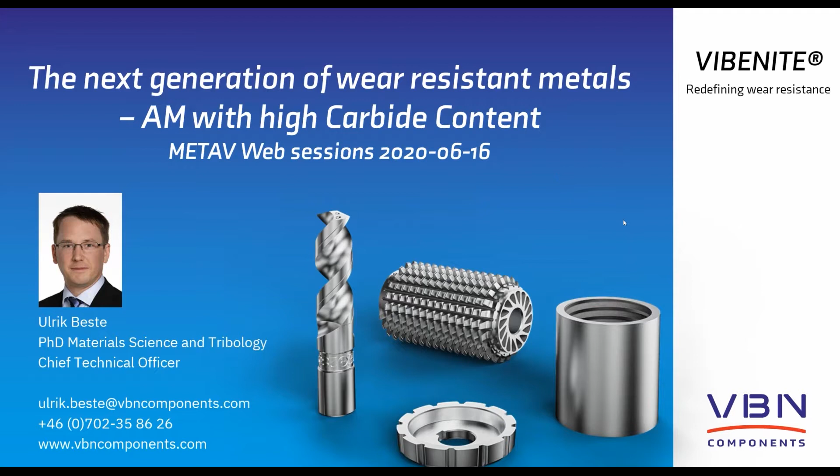This is VBN Components. We are a materials developing company. We have been working in materials for many years. This is based in, you can say, the Swedish powder manufacturing industry. Myself and fellows around here have also been much into tribology, that is the knowledge and science of wear and friction of materials.

So this and the powder manufacturing led to the idea of additive manufacturing of these kinds of materials. And now we've been active for more than 10 years. Here in Uppsala, we have an additive manufacturing production unit, which we produce and develop new materials. So the basis of the company is materials, powders, additive manufacturing, 3D printing, and tribology. This is the base of the company.

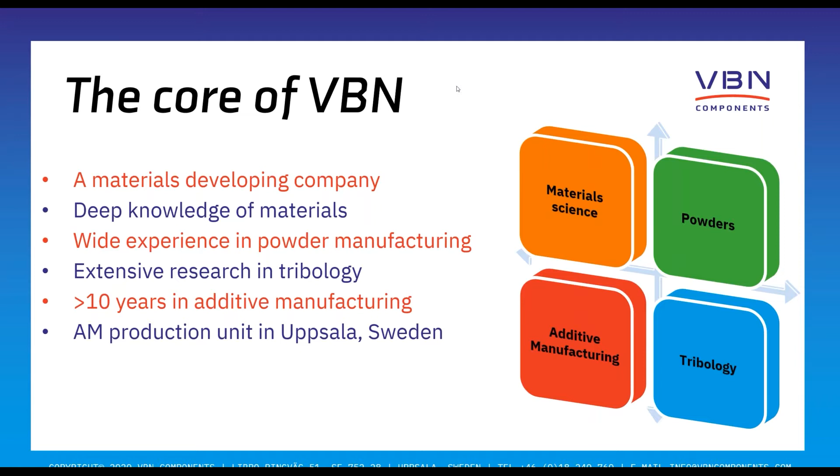Our vision is to renew the materials industry in the world. And today, you know that the manufacturing industry is going through a big change, what is typically called digitalization. And one very important part of this digitalization is additive manufacturing, which is a totally new way of making materials.

In this field, the biggest need is for new materials, and this is due to the developing of the machines being the major driver in this additive manufacturing business. But the materials now comes as the next question: what materials can we do in these machines? And this is what the focus of VBN Components has been from the very beginning.

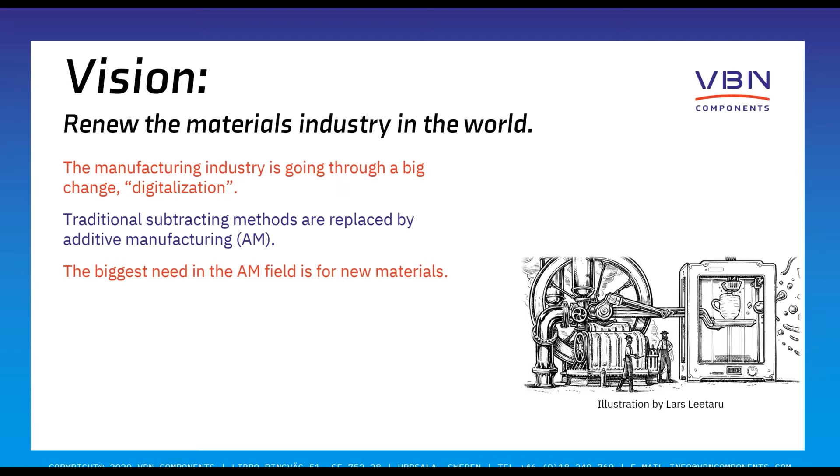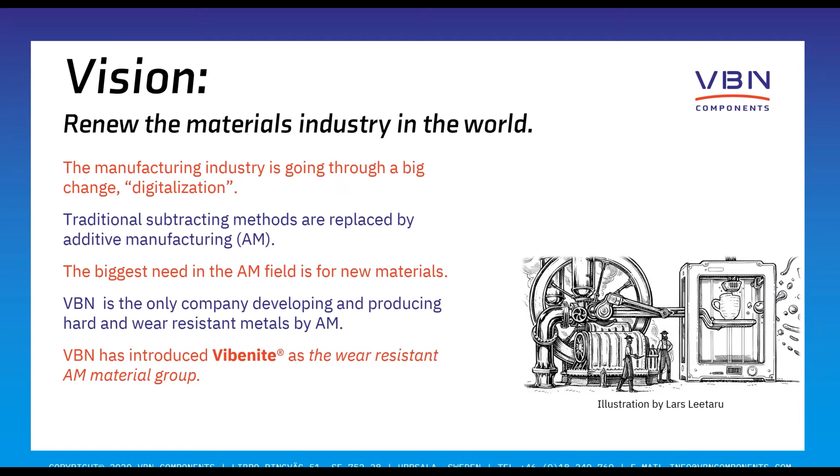And today we are the only company developing and producing hard and wear-resistant materials by additive manufacturing. And we have introduced the Vibenite as the wear-resistant material group. And this is what we are doing at the moment.

If we look into our materials, we today have 6 different wear-resistant materials. Starting from the bottom, which is the Vibenite 130. This is a new alloy that will be launched after the summer, and this is a tool steel, with a hardness range of about 48 to 60 Rockwell. So this is a very tough tool steel material.

You can compare it to H13, which is the most common tool steel material in the world. After that, if you go up in hardness scale, we come to the Vibenite 150, which is a high-speed steel material with a lot of carbides in it, and also higher hardness. It's a metallic matrix with carbides.

If we move even higher up, we come to the Vibenite 280 and the 290, and they are also high-speed steel materials. So 150, 280, and 290 are in the same high-speed steel region. The difference is the carbide content and the hardness. And the Vibenite 290 is the world's hardest commercially available steel material.

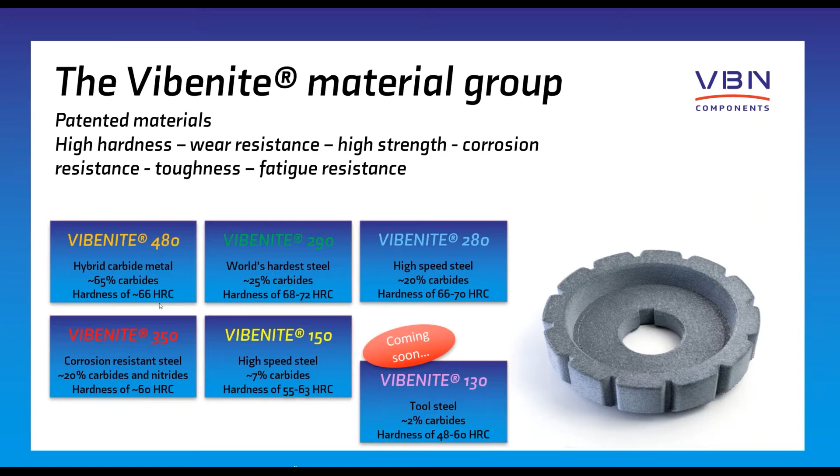We have high hardness, wear resistance, but also high strength, and high toughness in the toughest alloys. We also in general get very good fatigue resistance due to the high cleanliness of the materials. That is one of the major things in our materials—it's only extreme properties that we look at.

If we look at benefits, we have tried to divide them into 4 groups. First, look at the environmental friendliness of the materials. With this additive manufacturing technology, it's now possible to choose a better alloy for your end application. That leads to the total sum of material wasted being much less, because you can have better material in your end tools.

So to sum up, we have a 90% reduction of material consumption. We have a reduction of energy needed for producing the material and shaping the material. We also, of course, have less transport and much quicker development for better products.

In addition, we have long experience in this field, so we can support you with good help when you are trying to develop something new, to really use this technology at its best.

The end performance is, of course, a very important part of this. And then we have the alloys which I presented for you. Typically we have very high wear resistance and very high hardness, and now you do not need to soft machine the materials.

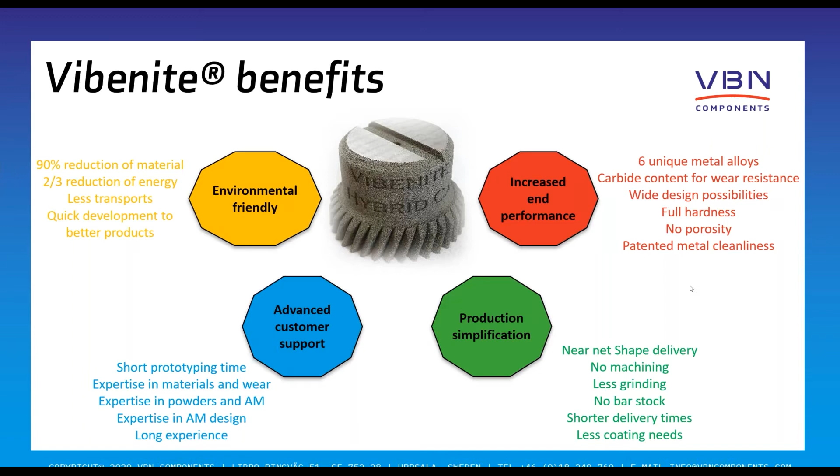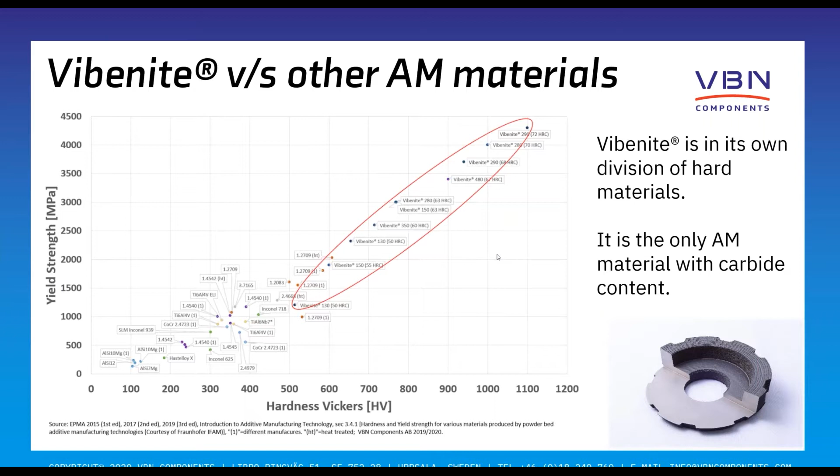So it's not a developing or a future alloy. This is something you can buy from us now.

Why should you 3D print wear-resistant metals? This is a typical comparison. Today, when you produce a component, you first need a material which is made in a steel plant, and you know all the steps in the steel plant. This is 200 years of development, which has come up to a very good quality level. But still, it's an extreme amount of process steps.

Then you send the bar to some kind of warehouse, a bar stock, and then you cut it up, and then you go for the machining in your machining shop. In the machining shop, you need to remove almost all the material which you produced in the steel plant. So you can see this is an extreme amount of process steps, and this is the big drawback with existing traditional manufacturing technique.

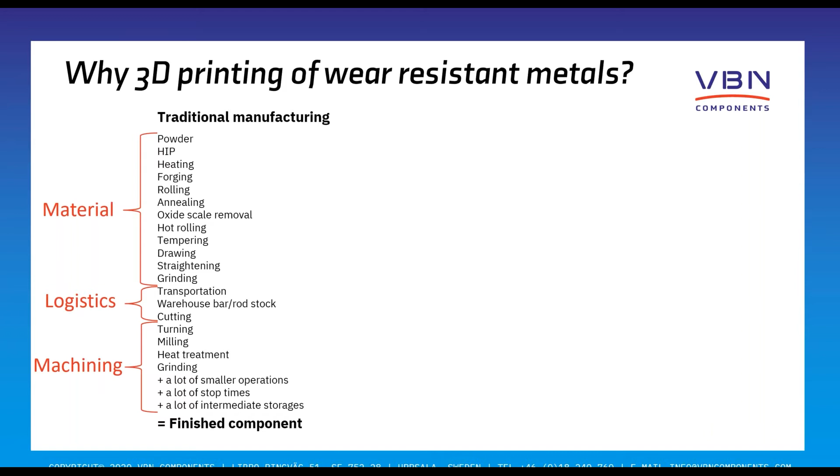By doing the Vibenite way, we take powder, and then we do the additive manufacturing printing, then we heat treat them, then we grind them, and then you have a finished component. This is the major paradigm shift which we are presenting here. This is a totally new way of making components.

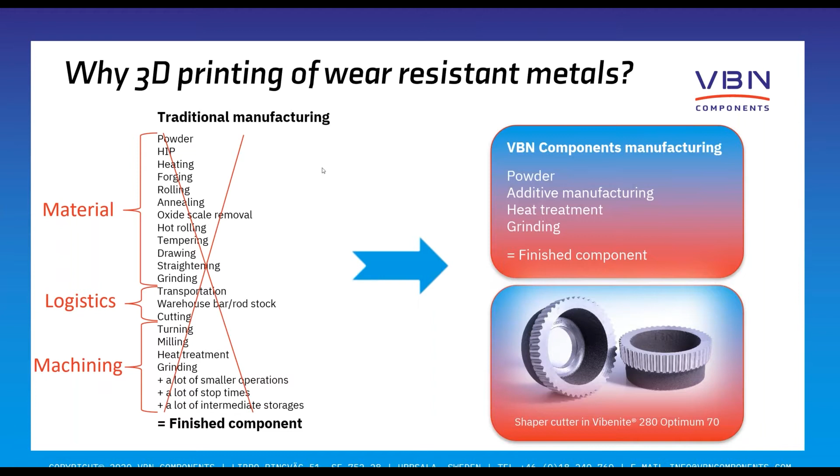If we look at cemented carbides, I'm trying... I don't know why it's not popping. Let me try to switch slide.

Here we go to the cemented carbide. We can look at the traditional way of manufacturing. You take your powders, do a lot of process technology, and then press a green body, which you need to sinter, and then grind it. And then you have the demands and limitations of this. You have this large series problem, you need the pressing tools, and you have shrinkage and sizing issues, etc.

All this traditional technology with cemented carbide leads to very good material, but you have a lot of limitations. Typically you have a problem in the brittleness of the material, and it's difficult to have a complex shape when you need pressing tools, green bodies and sintering. Also you need large series, it's very difficult to make 1, 2, or 10 of something when you need to make thousands to be profitable in the long run.

We do it like this: we take the powder, use additive manufacturing, heat treat it, and then grind it. Then we have a finished component in Vibenite 480. If you see this shift in material technology compared to the traditional, you see it's an extreme change in what you can do.

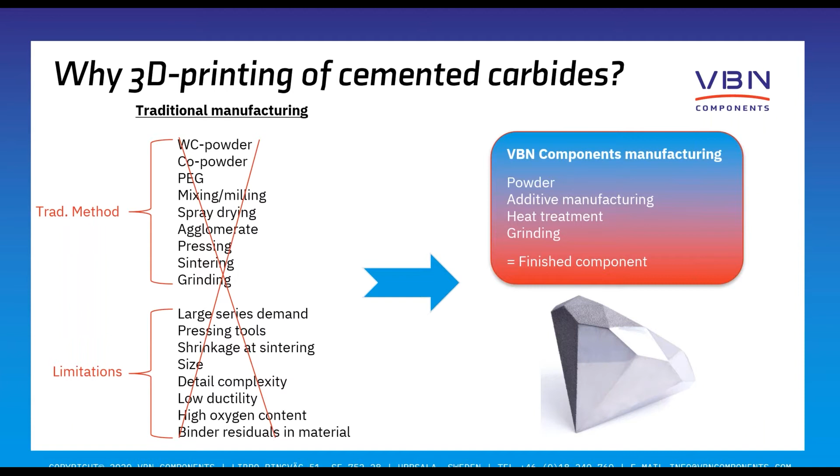If we look at the possibilities, just to sum up, the best profitability is achieved when you have explicit demands of wear resistance, hardness, heat resistance, or fatigue resistance. This is where our alloys perform the best.

We also need some kind of minimum size of the component today, due to the rough surface. We still make component blanks with a rough surface, so you need to grind if you have a cutting edge or so on. This is just a rule of thumb recommendation, 20 millimeters is not an exact value, it depends on your grinding cost compared to the printing cost.

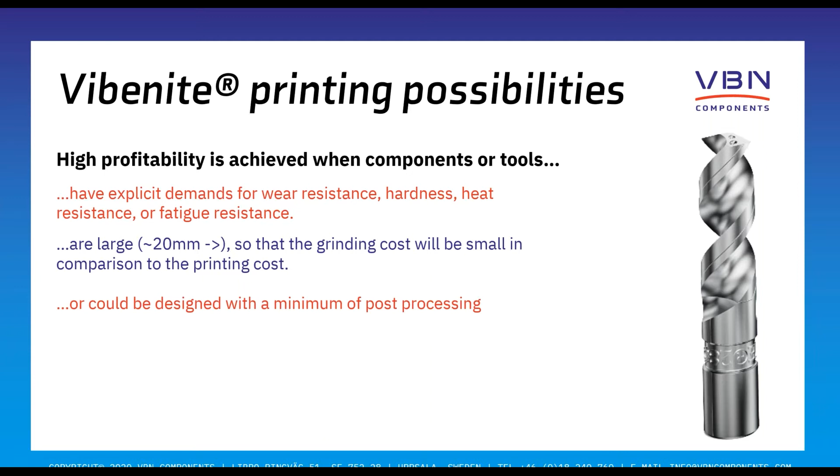You can also design components without the need for post-processing, leaving some surfaces rough where that's acceptable. And you also need some kind of complexity.

Of course we can produce cubes or cylinders directly, but if we do that, we don't use the freedom that additive manufacturing technology gives. We can do a test cube, which you typically do also, but really to benefit from this technology, you need complexity, and you need to use that complexity for better performance in your end application.

Today we have a limitation in build volume, which is typically about 230 by 230 by 350 millimeters. This is a machine parameter that we have today, and the price, of course, is set by serial size.

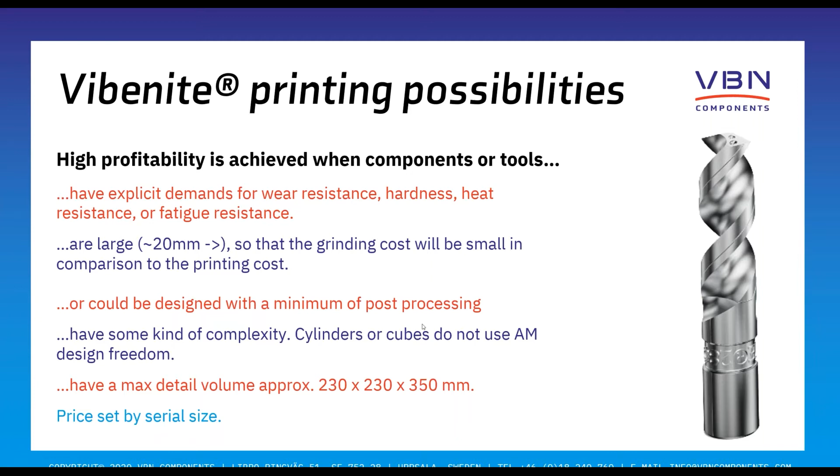If we look at surfaces, I mentioned that we have rough surfaces. You can see here on the picture to the left, we have three types of surface: the upper melt surface, the side surface, which is the most typical and largest area of the component, and number three, the lower surface with support structure traces.

To sum up, you can do a lot of things to minimize the need for support structure, but typically you need support structure to get good geometrical correctness of your component. If you don't, you get some swelling. We do not have the enormous problem you typically have in laser printing, since we use electron beam printing, but we still need to remove energy so that the component stays in shape.

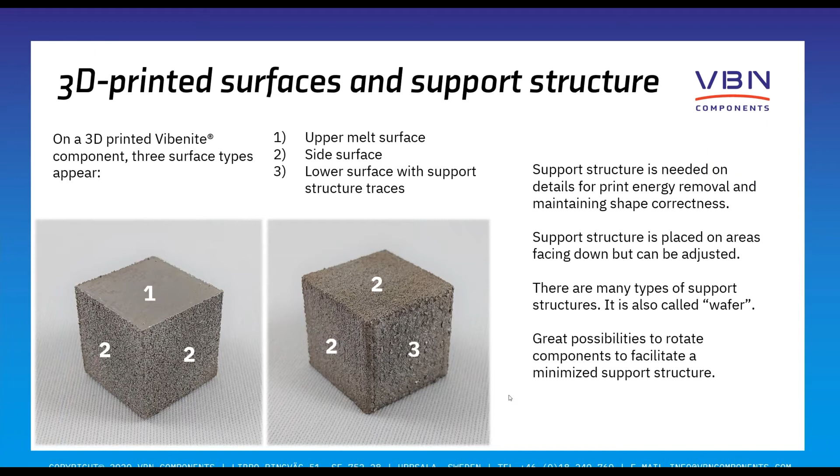Example 1. I will now go through a number of example areas where you can use this technology. For example, power skiving cutters. In this case, you can use better material than you use today.

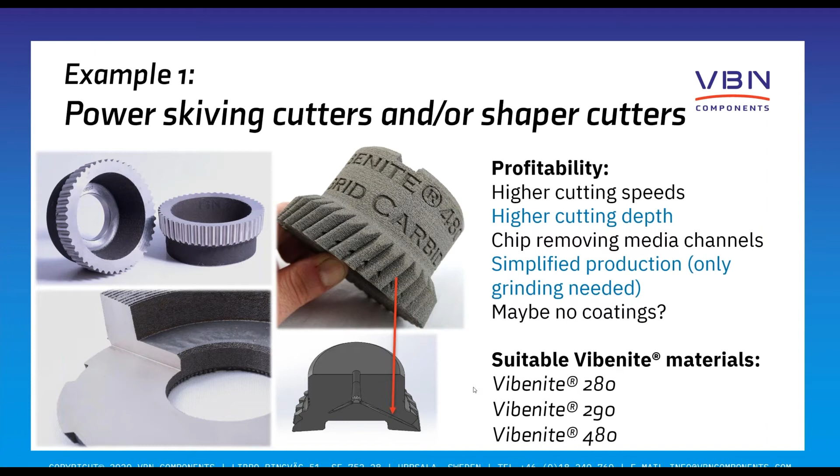Then we have large gear cutting hobs. We have been in this area for a long time, and we see the biggest benefit when you produce large hobs, where you need to reduce the weight and use the best materials to get high cutting speeds and high cutting depths, so that you can get a benefit from this new technology.

You can do a lot of things with this. For example, here you can also add media channels to cool and to remove chips.

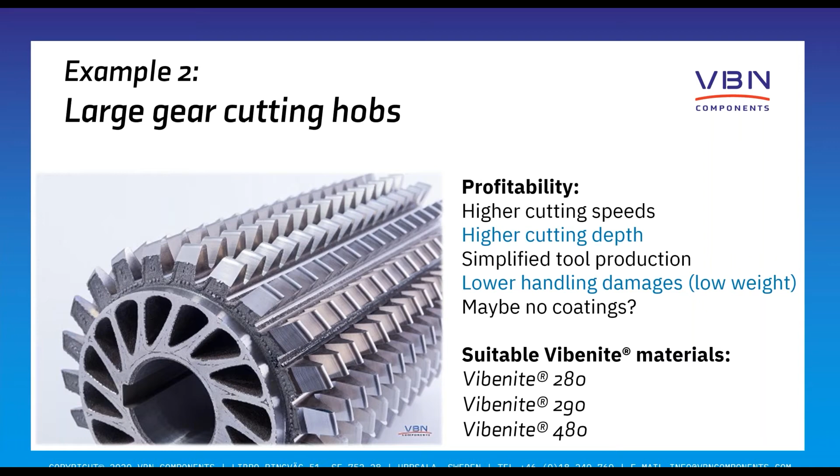Another area is pressure die casting tools. Here's an example from a governmentally funded project we ran a couple of years ago. This is aluminium casting, and we added a very coarse channel through the center of this tool. This led to a reduction of temperature from 296 degrees to 185 — a very heavy reduction of hotspot temperature, which is very good for the lifetime of the tool. This is just an example of what you can do; they can of course be smaller or bigger. This shows that it really works in the real world.

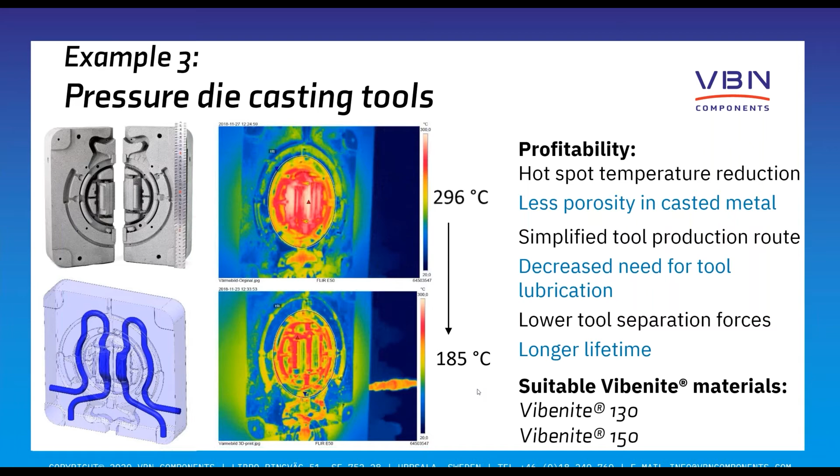Another area, in the same region you could say, is plastic or metal forming tools, or hot stamping tools. Here you can also use the technology to reduce weight, but also to have cooling channels or conformal cooling. You get longer lifetime with better alloys, but you can also reduce weight and hotspot temperatures and so on. So you get a quicker tool cooling time, and longer lifetime in your tools.

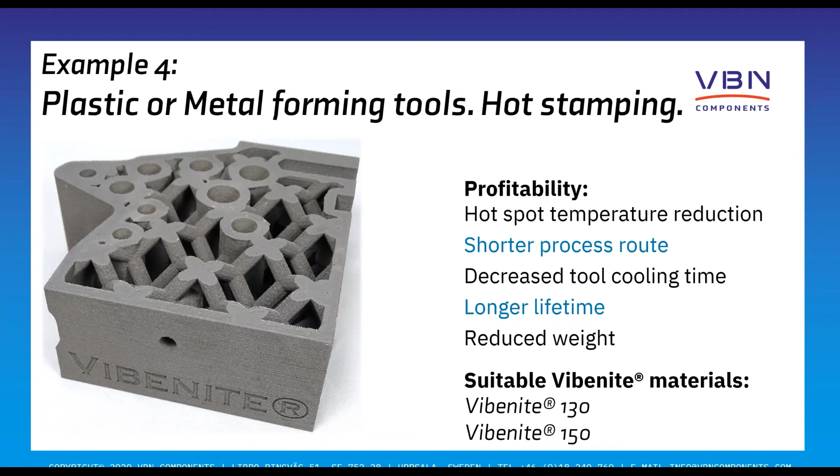Production tools are also a very wide area of what you can do, and here we show some examples. In this case, I made a sample holder.

It's very simple to take a drawing of a component you have, and then invert it to become a holder. You can see the inversion here — this is the diamond we've shown you in the public relations, and then we made a holder to be able to grind it. This is a very simple thing to do. In addition, you can also use this rough surface to get a better grip in your chuck jaw, for example. So here you can use this technology in many different ways — it's also a big area to use it in a good way.

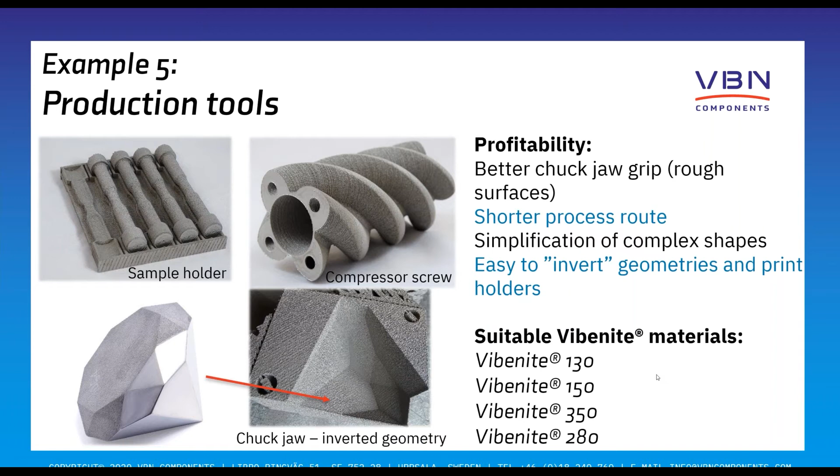Cutting knives is also an enormous area. Here you have sheet stamping examples, and here you have some very good knives in Vibenite 350.

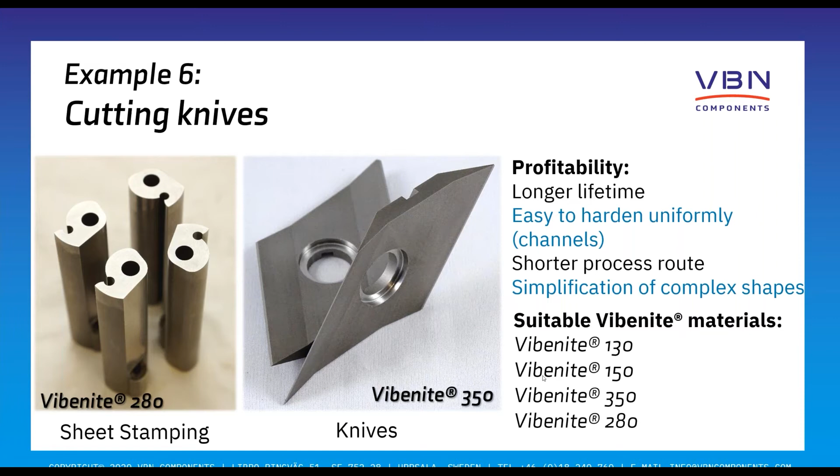One example here to the left, you can see the sheet stamping. You can get a more uniform hardening by having a hole inside the tool, because it's the edge that does the work cutting sheet metal. By having this hole, which costs nothing in the process, you can get much easier hardening, so you get a more uniform hardening, and you get the same hardness even if you regrind the tool. This is just an example of what's possible to do.

Wear protection is also a big area, and it could be anything. Here we have an example of an elbow for a pipe, so that you can have erosive wear protection. But the new thing here is that you can shape very hard materials into complex shapes very easily. That's a new thing, and you can use this for wear protection.

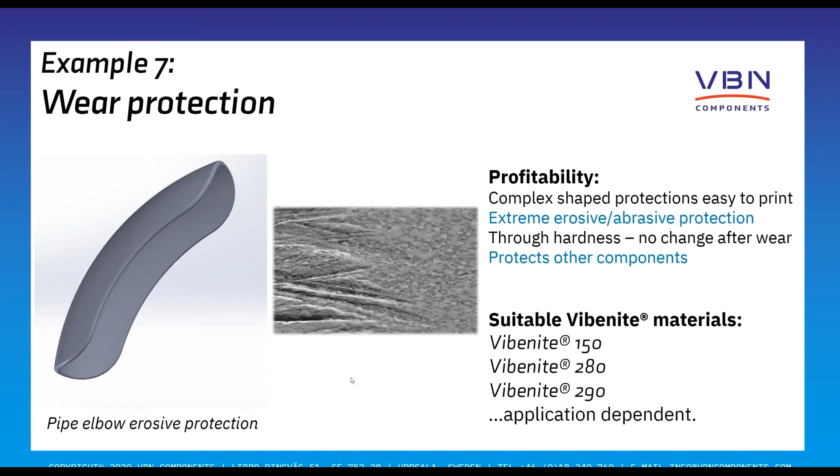There are a number of other possible applications — everybody needs something with wear resistance. Here we just want to show an example of Vibenite Combo, where we printed Vibenite 290 upon Vibenite 150 to combine toughness with hardness. This is just an example of what you can do. We ask our customers to come with ideas just to show what's possible to do.

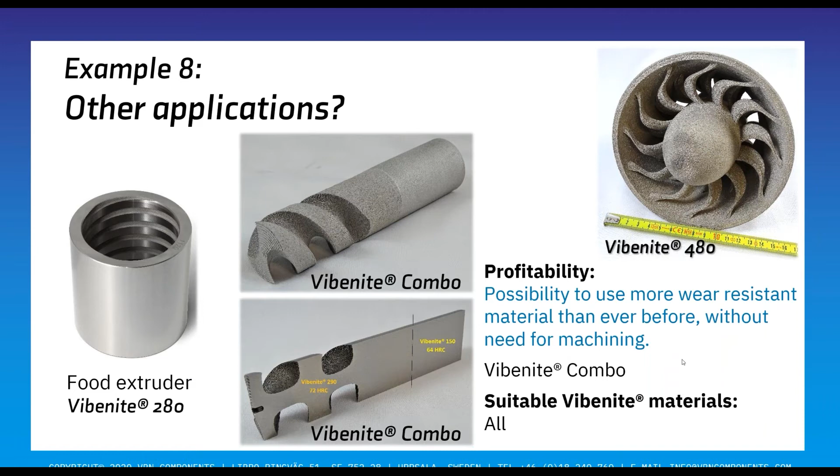This is our customer offer. Typically, we start with a pre-study. The customer asks us, is it possible to print this, or what material is the most beneficial? So we do a pre-study. It's a very simple thing.

It always includes one print of a final tool. It can also include geometrical and drawing discussions, so you get help to draw your component into good shape, and then we pick the material which can work in the application. And the result is just the answer to the question: does it work technically?

We can also go to the next step, where we help you with a better analysis of your existing problem. Since we're good at wear and so on, we can look into your existing tools or components and see if we can help you with a better choice of material. And again, the result is: does it work technically?

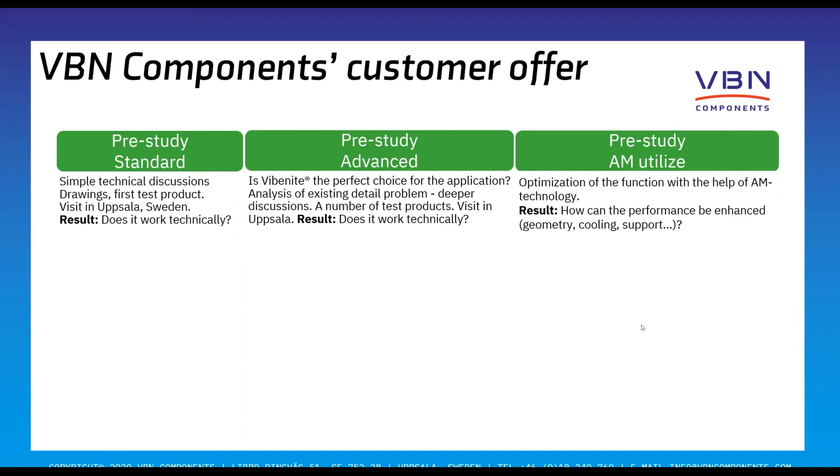Then we have a pre-study which we call AM Utilize, using additive manufacturing technology. We discuss with you, our customer, what your demands are in the end application, and together we come up with a good solution which is possible to print, but also the best thing to print.

Then we have what we call a production development project, for when you are interested in knowing how much it can cost in large serial production. We do a number of test builds with many components to see how we can optimize the process.

Then we have the direct print, which is simple. You send us a drawing, tell us what material you need and what hardness, and then we do it directly. Or we do the small serial production.

You have done the direct print, maybe also a pre-study, so you continue to buy from us. If you don't want your own production and aren't interested in that, we can do the production for you.

And for big serial production, we can offer a license solution, helping you choose the correct machines. We do the pre-printing of components, come to you with your print line setup, and provide all the software for melting the powders correctly. You can also get the IP rights, and we help you with the powder and so on. So this is the customer offer we give you.

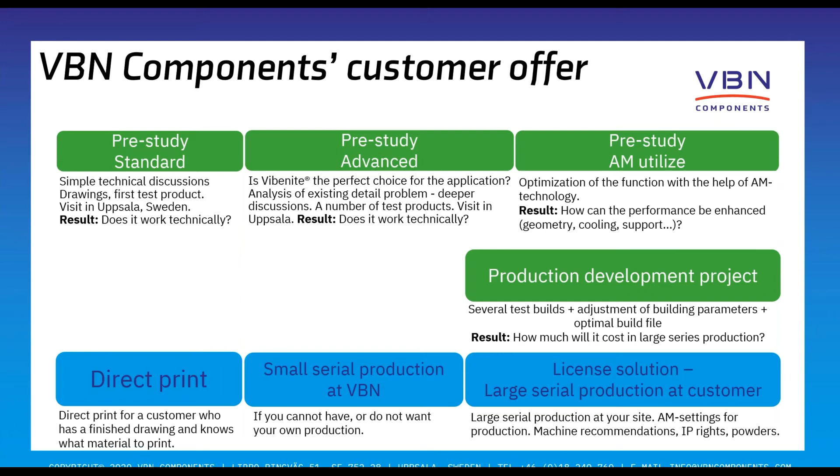And now we're into the question mark section. That was my 20 minutes typically, so now I ask you for questions if you have some. Yes, thank you very much, Ulrik, that was an interesting presentation.

You showed us many interesting examples, and I agree with you 100% that new materials for additive manufacturing are the next big thing after having many different types of additive manufacturing machines available. It's very interesting that you have such hard and wear-resistant materials available that will drive additive manufacturing to the next level, I think. So yeah, we have one question.

There's another question. The first question is about selling: if you are selling these materials also. Let me read the question: do you use your own laser powder bed fusion process to produce the components yourself, or do you also sell the powder for other additive manufacturing machines? Yes, it's a good question, of course.

We are today using electron beam melting for what we do. We offer the total package: either you buy a component from us with all the correct melting done at our site, or we sell you a license solution where we specify which machine you should choose and provide the settings. At the moment, it's not possible to just take the powder and use it in any machine. It's not that simple, and there are many different machines on the market, so it's impossible to just sell a powder.